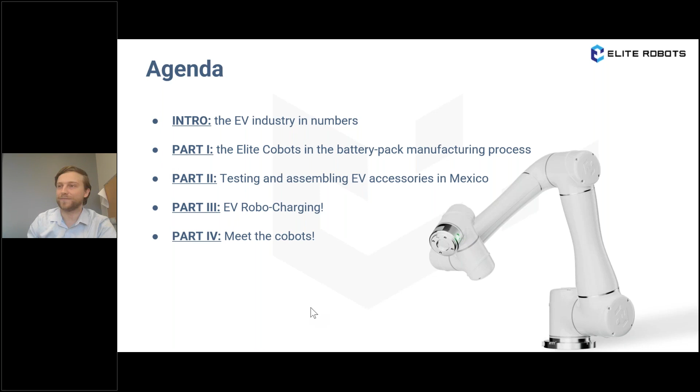Taking a front seat to electrifying these roads, we go to China, with a revenue projection of $292 billion in 2023. China is at the forefront of the electric vehicle revolution. This impressive growth can be attributed to key factors such as supportive government policies, subsidies, expanding the range of mini electric vehicles, and the introduction of more affordable brands into the market. China's commitment to sustainable transportation is evident, and it's a significant player in shaping the future of the electric vehicle industry.

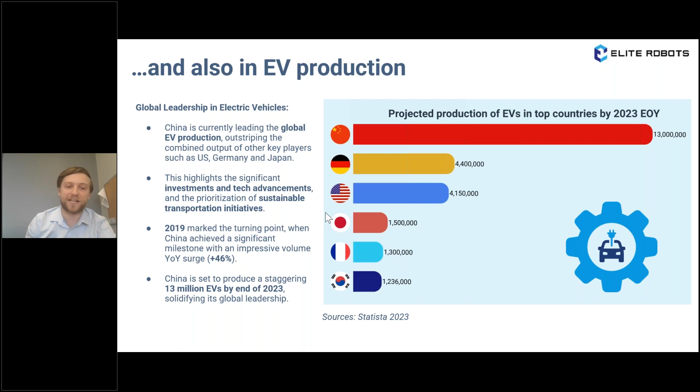Let's dive into the first part of our agenda, where we'll explore the role of elite robots in the electric vehicle battery pack manufacturing process.

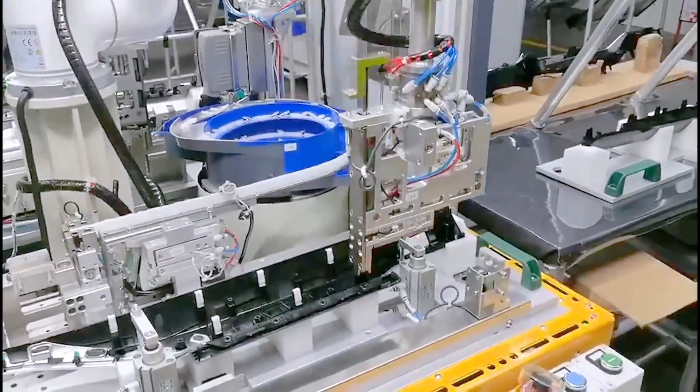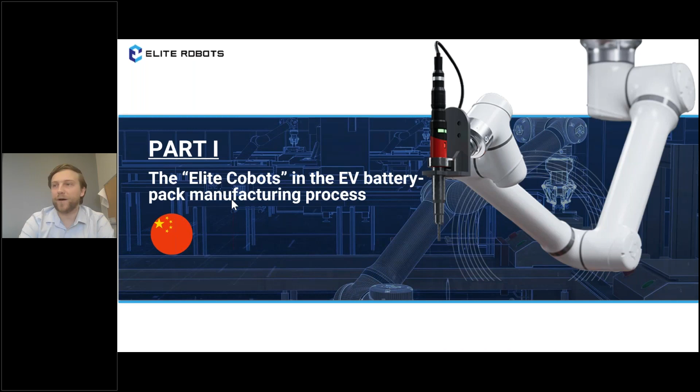Let's look at how elite cobots have taken part in the electric vehicle battery pack manufacturing process. The heart of electric vehicles is their battery pack. Most commonly, these packs are lithium ion, offering superior performance, efficiency, and safety compared to conventional batteries. These batteries are manufactured within gigafactories, large-scale facilities that not only produce new battery packs but also recycle old ones, recovering valuable materials. Positioned beneath the vehicle, these batteries consist of hundreds of cells organized into pockets, ultimately forming a unified large-scale battery integrated into the chassis. The battery pack is a critical component, and its efficient production is essential for the advancement of electric mobility.

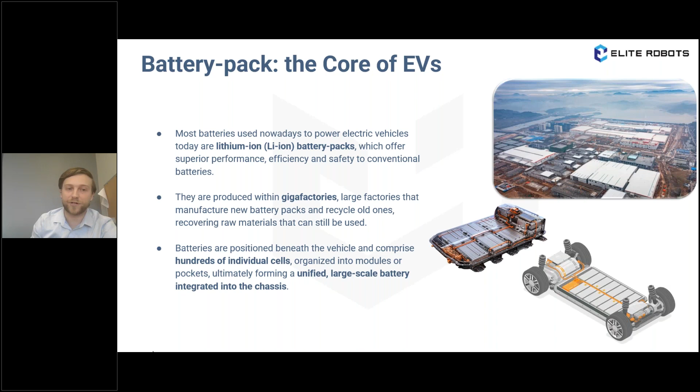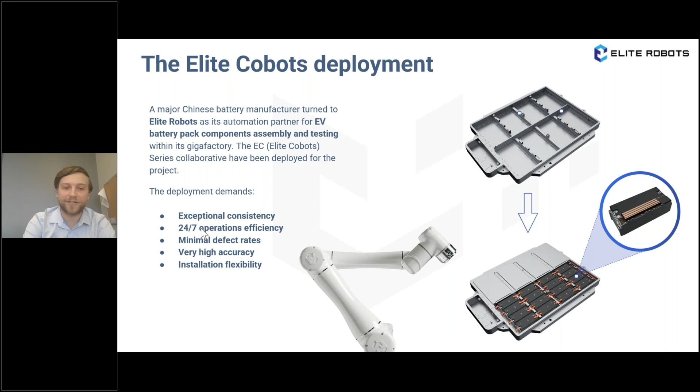Let's explore how elite robots are playing a crucial role in the automation of the electric vehicle battery pack. A major Chinese battery manufacturer turned to elite robots as its automation partner, specifically deploying the EC series for the assembly and testing of electric vehicle battery packs. This deployment demands exceptional consistency, 24/7 operational efficiency, minimal defect rates, very high accuracy, and installation flexibility. Elite cobots are proving indispensable in meeting these requirements, ensuring seamless and precise assembly of electric vehicle battery packs. As we move forward, we'll delve deeper into this collaboration and understand how cobots are shaping the future of electric vehicle manufacturing.

The deployment includes lower case cleaning, inline module assembly, inline cover plate tightening, and end-of-the-line testing of these battery packs.

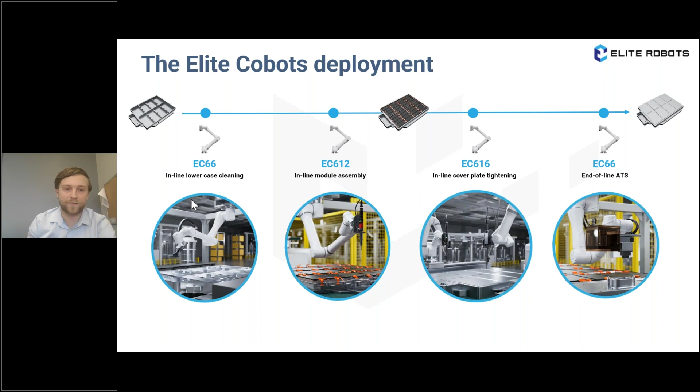Lower case cleaning, deployed here in the EC66 cobot. The end flange is equipped with a vacuum brush, and the robot cleans out these lower trays for loose debris, including dust or shavings that you don't want in those battery packs during production. The flexibility of this robot allows all of its joints to move at 360 degrees, able to reach into all the nooks and crannies of that case to vacuum out anything that may have fallen in there.

Due to its lightweight frame and low profile, it's able to be mounted on a low hanging frame upside down. The cobot can be mounted at any angle, and being upside down like this allows it to reach into the lower case without needing to be awkwardly mounted off to the side, restricting its range or reach.

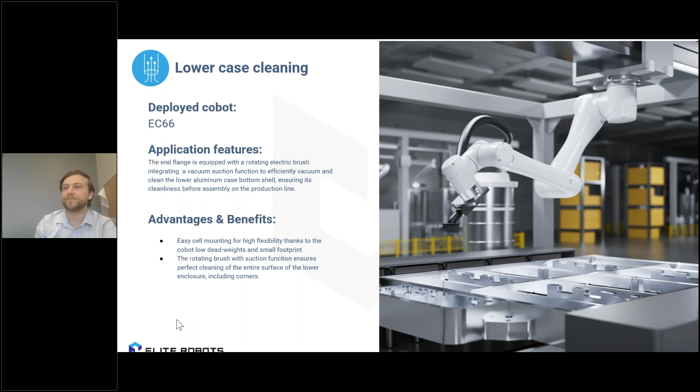Next, we go into vision system integration with our EC612, one of our larger robots. Despite its larger size, it is still able to be mounted upside down above the battery pack. This robot is equipped with a 2D scanner.

First, it scans a QR code. This means the cell knows which battery pack it's dealing with for serialization and tracking purposes. That same scanner is also able to locate screw holes to perform a screwing operation along the battery pack.

This large robot is able to reach around the entire battery pack, doing all of these screwings per pack with 100 Newtons of force consistently applied at each point, with a high degree of accuracy based off the coordinates provided by the scanner, allowing it to repeat this process over and over again with even the slightest adjustments necessary to make each of these screwings happen.

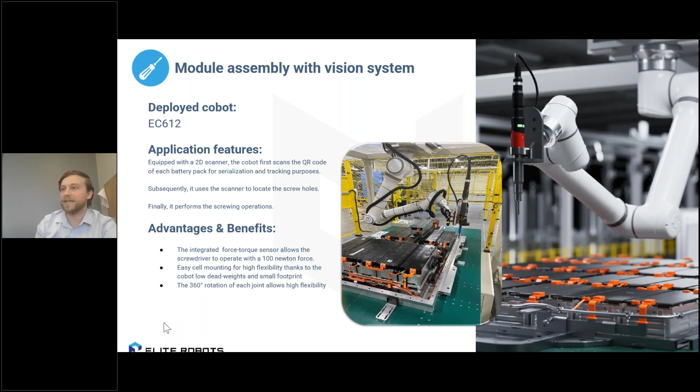Next, we go to cover plate tightening. This cycle requires 60 screwings per cycle, so we employ the EC616, two of them actually, mounted opposite each other.

These robots are able to communicate with each other using our very flexible SDK software package. The robots know if the other robot is in its space, increasing safety and allowing them to prevent collisions. Each is mounted with a screwing tool and able to do these 60 screwings per cycle without risk of collision or missing a screwing spot, with very high accuracy. This not only reduces cycle time but guarantees a much safer work environment.

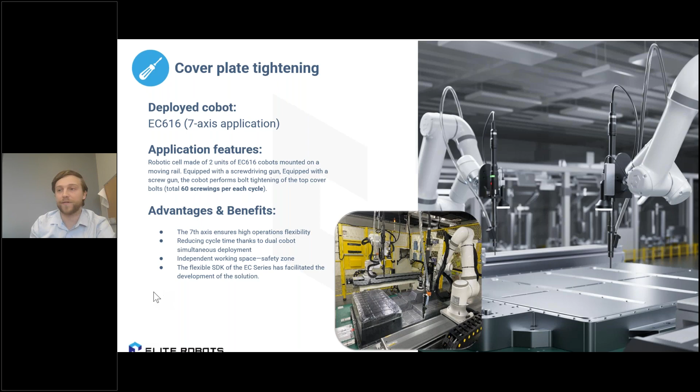Finally, once these battery packs are put together, they need to be tested. We employ another one of our EC66s, mounted upside down with a device to plug into the battery packs, to make sure the connection is secure and the battery packs are operating effectively.

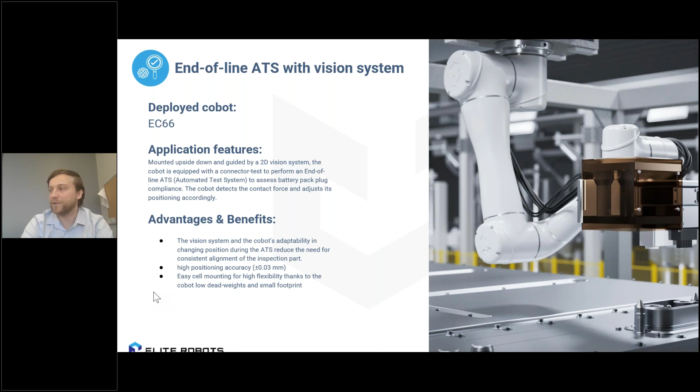For the robot to do this, it needs to be incredibly accurate in order to line up the device with the battery pack, because any misalignment could cause damage. But thankfully, the EC66 has 0.03 millimeters of accuracy, and while mounted upside down, maintains that accuracy, as it's able to plug into every battery pack without missing a beat.

Next, we're going to move on to how electric vehicle accessories have been pushed with collaborative robots.

Starting with Mexico. A confluence of factors have given Mexico a substantial advancement in electric vehicle manufacturing. Firstly, they have a strategic geographical location, playing a pivotal role in the production of the automotive industry. Mexico has become a central player in the evolving dynamics of this global manufacturing, and this advantageous location facilitates efficient access to key markets and enhances the overall logistics of the electric vehicle supply chain.

Moreover, the commitment of the Mexican government to foster a conducive environment for EV manufacturing cannot be overstated either. This provides a stable and supportive framework for investors, making Mexico an attractive destination for significant investments in the sector. Cost-effective resources further contribute to Mexico's appeal as an EV manufacturing hub, ensuring they remain competitive and economically viable for companies to establish vehicle production facilities there.

Additionally, the ongoing fragmentation of global supply chains has played into Mexico's favor. As supply chains continue to evolve, Mexico has positioned itself as a critical player, benefiting from the diversification of manufacturing operations worldwide. The attractiveness of Mexico is leading automotive players to not ignore these advantages as they move their industries to Mexico as a strategic location, especially in electric vehicle manufacturing.

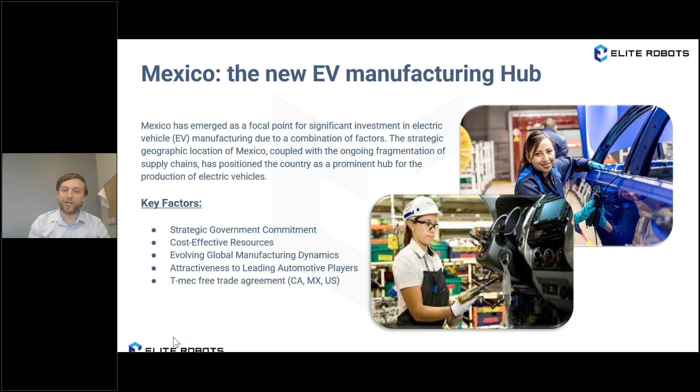And lastly, the trade dynamics facilitated by the USMCA, a free trade agreement, give another layer of appeal, fostering seamless trade between Canada, Mexico, and the United States, providing a streamlined platform for the exchange of goods relating to electric vehicle manufacturing.

Starting with steering wheels, Elite Robot was chosen by ZF, a global technological company based in Germany, with the objective of enhancing efficiency, reducing labor costs, and improving the efficiencies of its plant in Mexico. Equipped with a screwdriver, this robot does screwing applications onto a steering wheel that will go into electric vehicles. In order to maintain a very high degree of accuracy, they are using our EC66 with 0.03 millimeters of accuracy. This high accuracy, as well as the collaborative robot's built-in safety features, allows it to work right next to human operators.

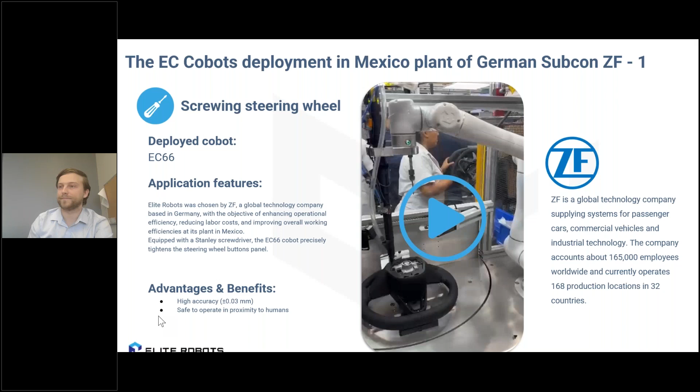Next, they took 2 more EC66s, but instead of just screw driving, now they're testing the steering wheels. This station would normally require 3 human operators, which has a high failure rate as well as a lot of points of failure for accuracy.

So they employed 2 EC66s to test the buttons on the steering wheel so that the robots can engage with the steering wheel, see if the input has been reached, and then pass the steering wheel over to the other robot for final testing and inspection, cutting this down from 3 human operators to only 1, increasing accuracy and safety and reducing cycle time.

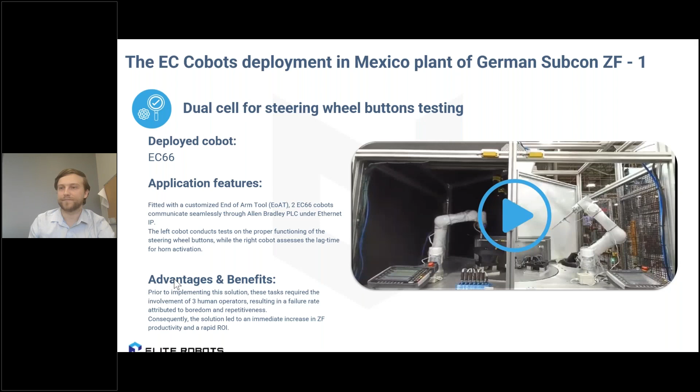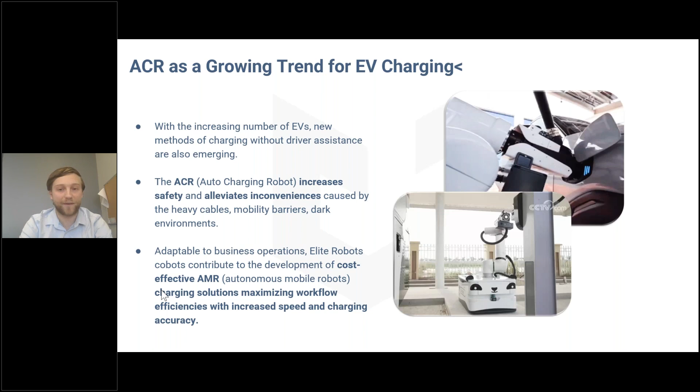Next, we're going to move into electric vehicle robocharging. With more electric vehicles entering the market, more people want to charge their vehicles without having to get out and do it themselves. This brings in the ACR, the auto charging robot, not only increasing safety, but alleviating inconveniences caused by heavy cables, mobility barriers, dark environments, and it's adaptable to business operations. Elite Robot continues to contribute cost-effective autonomous mobile robot charging solutions, maximizing workflow with increased speed and accuracy.

One solution was worked with Li Auto. This robot combines an EC robotic arm, a vision system, and Li Auto's AI algorithm to create an autonomous vehicle charging solution. This robot will use a vision system to locate the charging port on your car. Not only that, but it has obstacle avoidance, so if something were to get in the way or come near it, it would be able to avoid it and still make it to the plug.

Once it's done charging, it'll remove the charging cable and even close the cover on the charging port, allowing the driver to simply leave after their car is charged without having to do any hands-on work with the charging process. To do this, the Li algorithm combined with the robot needs to achieve a docking accuracy of less than 0.1 millimeters, and it has to do this autonomously with obstacle avoidance. Thanks to the integration of all these devices together, this is made a reality, where robots are able to auto-charge cars without a single person having to come up and touch them.

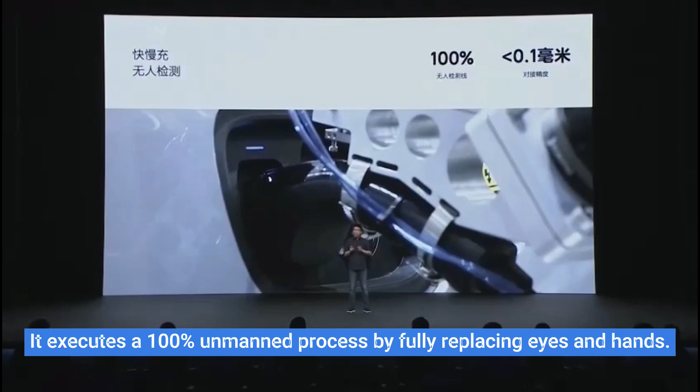Other ACR solutions with Elite Robots include the Tianjin Governmental New Energy Service Center, where they launched a charging mobile solution in July of 2023, as well as a mobile solution in 2022 for e-cars and e-buses.

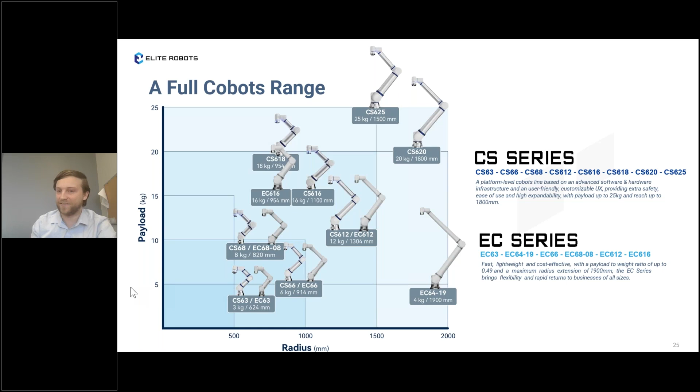We offer our EC series, which is our lightweight, cost-effective robot, and our new platform-level advanced software and hardware version, the CS series. Starting with the EC series, our cost-effective original line features from the EC63 all the way up to our EC6419. All of these collaborative robots offer an IP54 safety rating, and they have communication protocols ranging from Ethernet IP to Profinet to Modbus, and a very friendly industrial teaching interface, similar to common industrial language. They maintain very high accuracies, all the way down to 0.02 millimeters of accuracy.

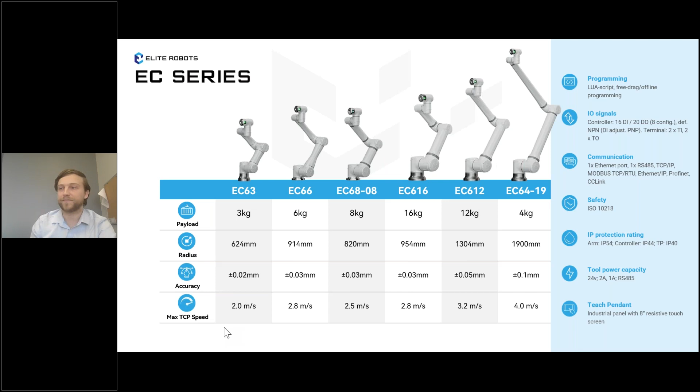A product highlight to keep in mind is our EC6419, a 1900 millimeter reaching robot with a 4 kilogram payload. Very good for effortless, long-range reaching operations, such as 3D scanning or quality inspection, panel lifting, or small-scale palletizing.

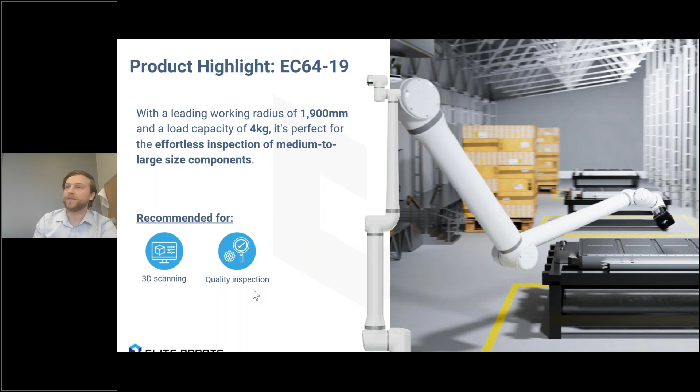Some of the other main advantages would be our web pendant, the ability for you to control the robot via a computer or using a separate PLC to drive the robot. Our rugged industrial teach pendant is very friendly to use, but we also offer the web version if you want a more computer-based operation.

All of our robots come with collision detection, among other safety features, to allow safe proximity work with human operators. Our large range up to 1900 millimeters means we can do anything from small scale, tiny micro work up to larger palletizing and more industrious machine tending.

They're all flexible to install. Lightweight profiles can be mounted upside down on walls. They're very fast too, up to 4 meters per second of speed.

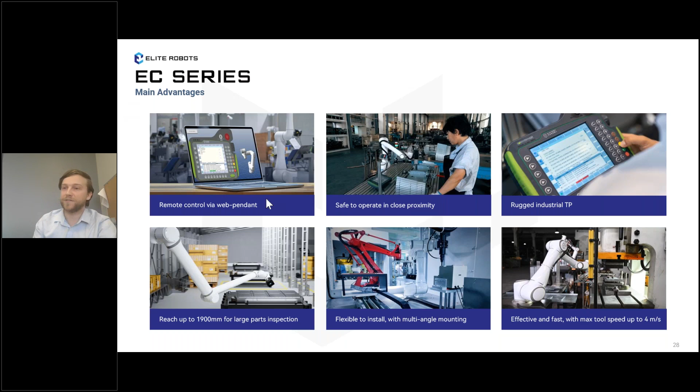The EC series has found itself with a proven track record among multiple fields, from small PCB boards tightening screws on small control boards, all the way up to hospital work in laboratories and wellness. They can do heavier duty work like palletizing, machine tending, welding, as well as friendlier tasks like fast food and catering, serving tea. The robots are flexible and diverse in their applications.

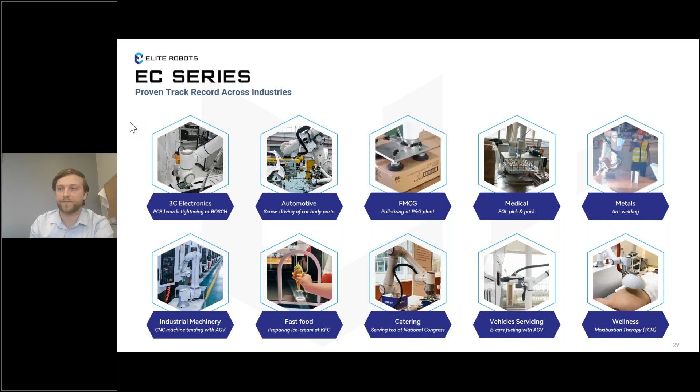Moving to our CS series. This is our newer line, higher IP rating, more user-friendly interfacing robot, ranging from the CS63 all the way up to our CS625. Accuracies all the way down to 0.02 millimeters, and speeds up to 3.9 meters per second.

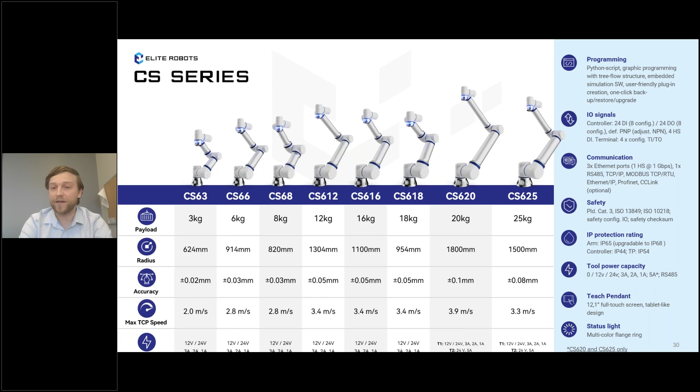These robots are just as fast and capable as the EC series, but with a higher IP rating and a more friendly user interface, focusing on a more graphical interface, providing much easier understanding for those who are new to robotics. That higher payload capacity offers an even further range of options than the EC series, while still maintaining a very high degree of robustness.

And they also maintain all of those communication protocols like Ethernet, Profinet, CC-Link, which makes it very easy to integrate either a sole robot or as part of a cell.

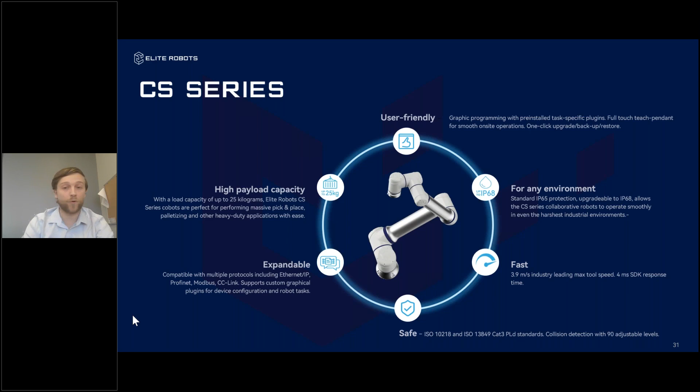These expandable platforms include plugins. They include talking to separate programs on a computer, such as Python scripts, Java scripts, C++, and C#, as well as talking to other devices through Ethernet IP, RS485, or other common network protocols.

The robots are very, very flexible. You can have just one robot by itself doing an operation on its own every day and any day, or you can put it as part of a larger cell with other robots, CNCs, even as part of a database if you're trying to track where your pallets are going or how many boxes it's processed. The robot is very capable of integration among larger systems.

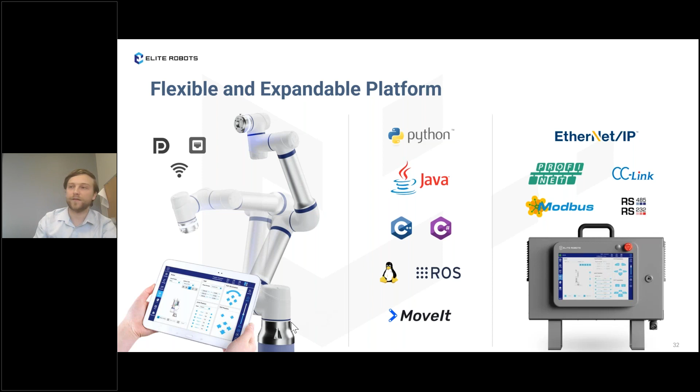A CS highlight to talk about will be our CS620, a 20 kilogram, 1800 millimeter reach robot. Despite its long reach and high payload, it still maintains 0.1 millimeter of accuracy. Up to 5 amps of tool power capacity, meaning the tool flange alone can drive much more complex end-of-arm toolings, with multiple devices potentially added to the end of them. The CS620 is a very robust and capable robot in larger applications like welding or heavier duty palletizing.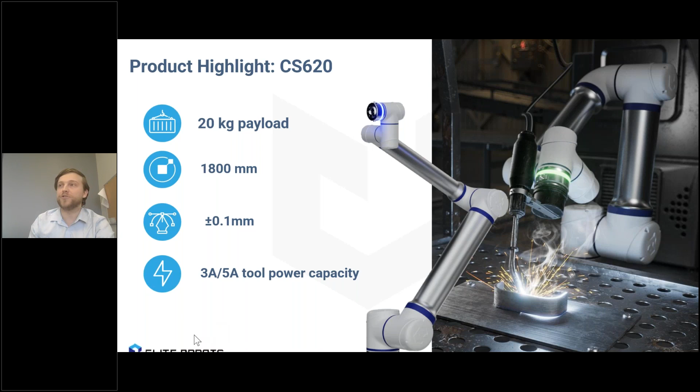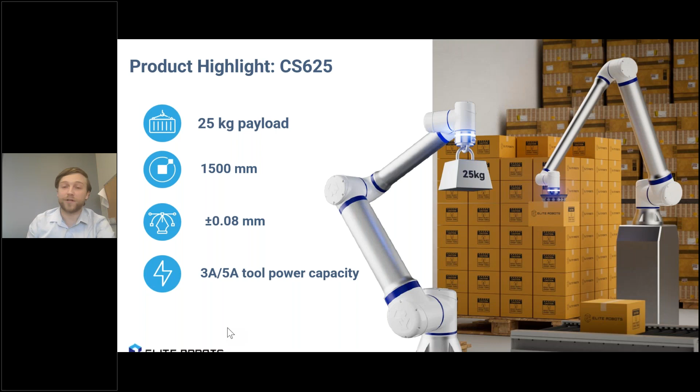But we also want to bring attention to our CS625, a 25 kilogram, 1500 millimeter reach robot, 0.08 millimeters of accuracy, and also maintaining that 5 amps of tool power potential. Our strongest robot with 1.5 meters of reach. This is a very robust and heavy duty robot, capable of even heavier duty activities. This robot is currently the strongest one that the CS series has on hand.